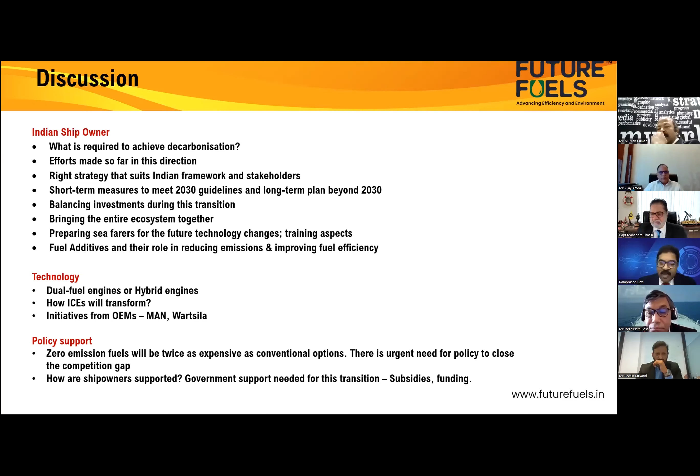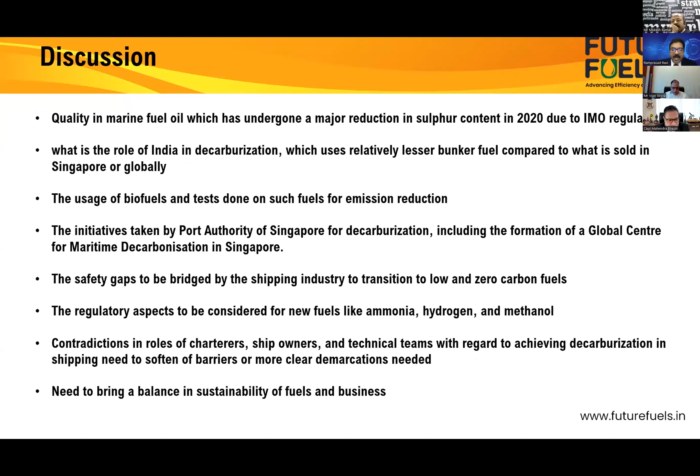Collectively, we put together the topics you see on the screen: what the Indian ship owner should be doing when at the crossroads of many options and challenges, how technology will change, what kind of policy support we require from government, and what is the quality of marine fuel coming up. Are there any interim strategies before we reach the net zero goals, any shortcut methods we can adopt? So a host of issues are there.

I'm not getting into the details because you have a wonderful set of panelists and two sessions awaiting to share their insights in this webinar.

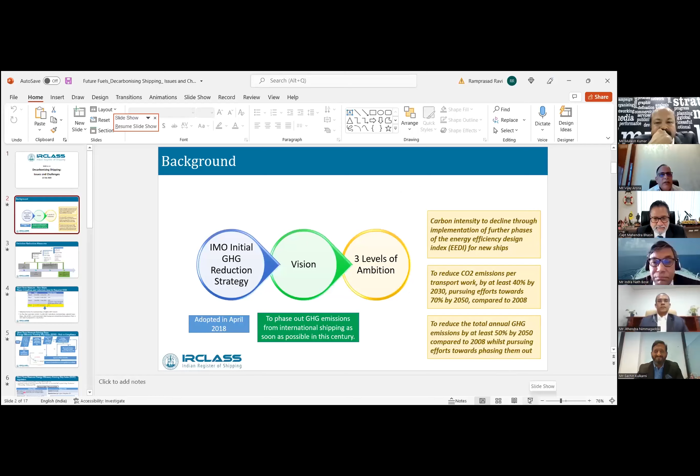Anything starts with a strategy, and if you look at IMO, they have been working on how the various emissions in the atmosphere have been controlled over a period of time. We talk about NOx emissions - tier 1, tier 2 requirements came, then it came to sulfur, desulfurization, and later on came the IMO strategy on decarbonization, saying how we can further improve GHG emissions.

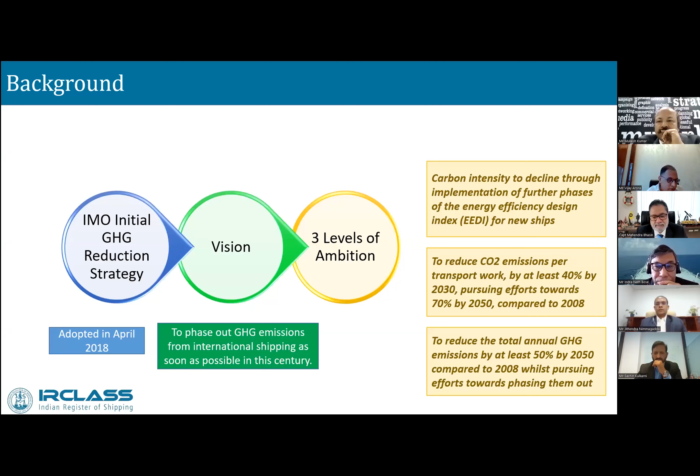This IMO strategy was adopted in April 2018. The vision was to phase out GHG emissions from international shipping as soon as possible in this century. To achieve this, we desired a combination of factors: carbon intensity should improve by improving the EEDI, we should reduce CO2 emissions by 40% by 2030 and 70% by 2050, and reduce GHG emissions by 2050, all compared to 2008 levels.

So to achieve the vision, there were short-term, mid-term, and long-term measures adopted. Short-term measures were from 2018 to 2023. 2023 to 2030 are mid-term, and 2030 onwards will be long-term measures.

We are currently in the short-term measures. When we look at those measures, we can see that in 2018 we came out with something, SEEMP Part 2, which talked about how fuel consumption should be collected, and in 2019 we started collecting the fuel consumption. Then in 2020, we talked about how the new ships' EEDI phase can be advanced, and that is how new ships are helping us see that CO2 emissions can be reduced.

At the same time, we are coming out in 2023, where EEXI and SEEMP Part 3 are coming out, where in EEXI we'll be using the IMO fuel consumption data, which is available with us, to see how the carbon intensity indicator will be used to determine how both existing ships and new ships combined together are able to help us achieve the 40% reduction of CO2 emissions by 2030.

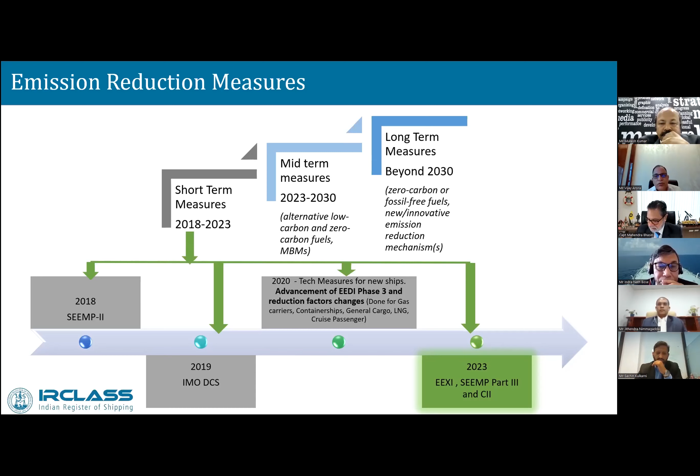This is talking about the various phases of reductions which were applicable for EEDI, mostly from the new ships. Basically, the effort started from 2013, and the efforts are on the direction of how we can reduce CO2 emissions by designing ships in a manner that fuel consumption is reduced.

As stated in the IMO strategy in 2018, phase 3 has now been advanced to see that certain ship types of larger tonnage will be requested to start building ships in a manner that CO2 emissions are reduced. This advance from phase 2 to phase 3 will take place from April 2022, where such ships, maybe gas carriers or container ships, will be advised to have further reduction factors of 30% applicable.

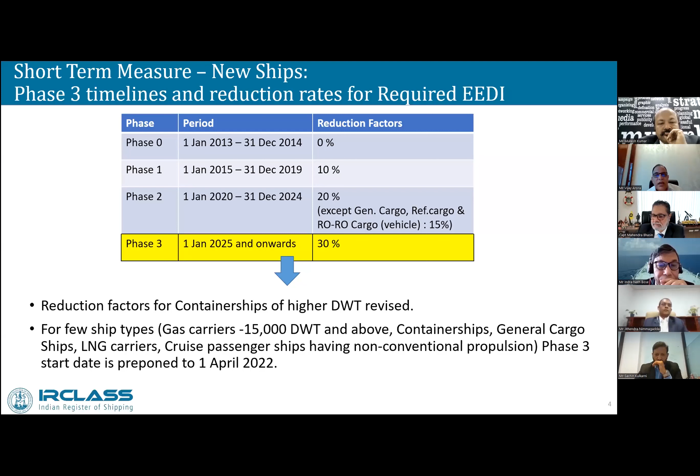As just stated, the combination of new ships and existing ships will continue for some time while we are using fossil fuels, and new ships are being designed with higher reduction factors. Even the existing ships need to catch up with the new ships basically.

For that matter, IMO came out with a regulation stating that ships of 400 GT and above, and certain ship types mentioned in regulation 25, if their threshold value is greater than a certain deadweight, are subjected to this regulation. That is how the attained EEXI will be calculated. The required EEXI will be calculated, and we'll be comparing that attained EEXI should be less than the required EEXI, to see that the ships are issued the technical file and the International Energy Efficiency Certificate.

This will be mandatory from 1st January 2023, coming on any annual, intermediate or renewal survey falling due after this date. But the regulation will become effective from 1st November 2022.

I would like to reinforce this issue: 1st November 2022 is a very important date. By this date, the ship owner should ensure that the technical file, if possible, can be placed on board. So if the PSC boards the vessel, you have a technical file available with you.

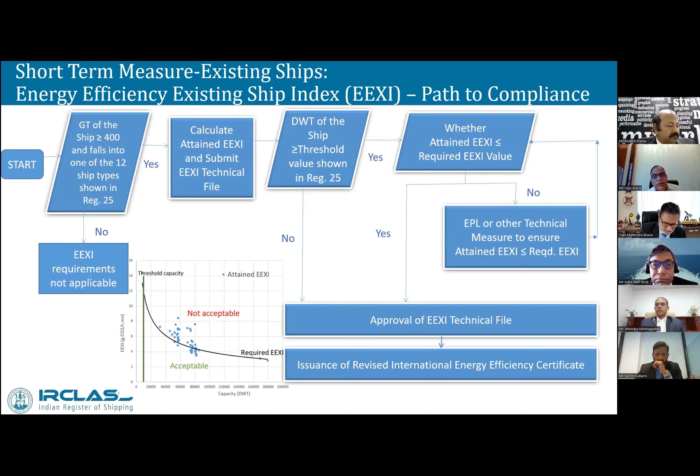And then the IEC can be issued when the surveyor boards after 1st January 2023 for whatever first survey falls due. So this is talking about attained and required EEXI, which I talked about.

Here I have just given information as to what all documents are required, what all parameters are required for submission for calculation of attained and required EEXI, as shown on the screen. Specific fuel consumption is required, engine power is required, capacity and deadweight and reference speed are required, and conversion factor is required.

For calculation of the attained EEXI, the required EEXI has a formula which talks about needing the reference line value and the reduction factors available. Here, the important point is that the reduction factors for EEXI are compared to phase 2 of EEDI. That means today's existing ships have to match with the EEDI of ships built to phase 2 requirements, which is a very difficult task, but the owners have to do it.

Here, a little more difficult task is that if the ships are built before 2013 and don't have the sea trial report, there are some issues. But yes, those issues can be resolved, where either you can opt for the approximate value to be used, or you can go for CFD analysis.

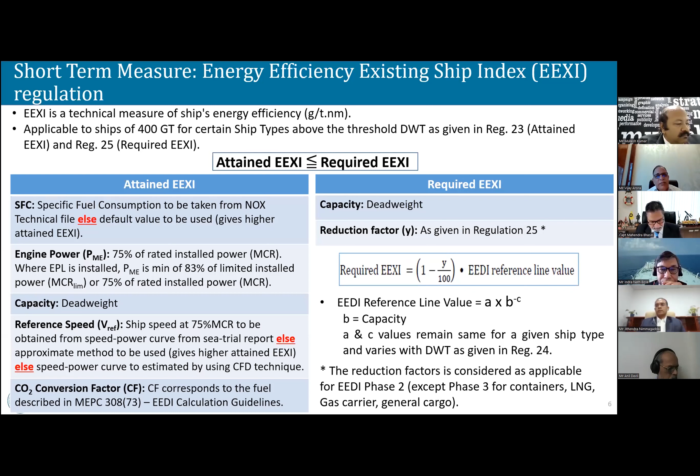The approximate value helps you, but it is not so encouraging for the ship owner because the attained EEXI goes on the higher side, by which the ship owner is affected. But if CFD techniques can be used to really determine the reference value, which is not otherwise available, then the ship owner is at least not badly affected.

So these are a few other situations which can help us if the attained EEXI is not less than the required EEXI. Everybody is aware of engine power limitation; then we can always superimpose certain fixtures like a bulbous bow, or we can put some boss cap fins, or we can adopt air lubrication systems.

These are energy saving devices which are available and can be used in case the attained EEXI is coming out to be greater than the required EEXI, or we can use a combination of factors. Let us be clear that if we are able to meet EEXI today, it is good.

But you have to meet CII also for all the time till you operate these ships. So it is always better to improve your attained EEXI to a larger extent so the design itself takes care of your operational efficiency, because old ships cannot operate more efficiently than they do today. You can control to some extent, but if you fit such energy saving devices on your ships, you will be able to run them for a larger period, because this design efficiency will give you a factor in the CII part.

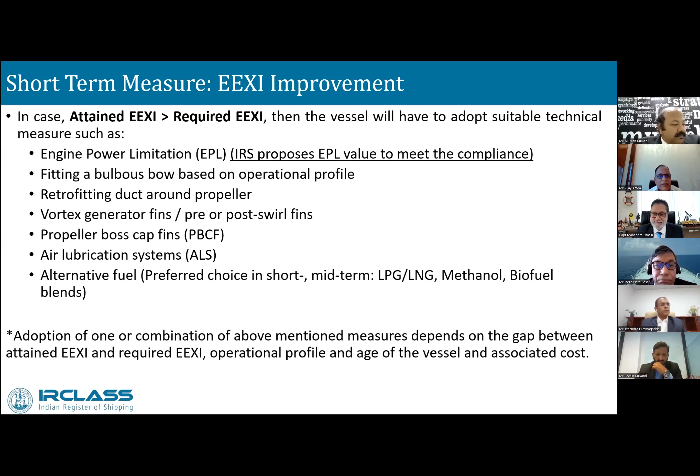This is again for the use of the industries and the people who are going to sail on board, because when EPL is used, it is not that you cannot override it. You can override it in certain situations which are mentioned in the onboard manual.

It could be adverse weather condition, rescue operation, or avoidance of pirates, and in those cases you need to record it in the onboard management manual, then inform the administrator, the RO, that you did use it, and at the next port ensure you bring it back to normal.

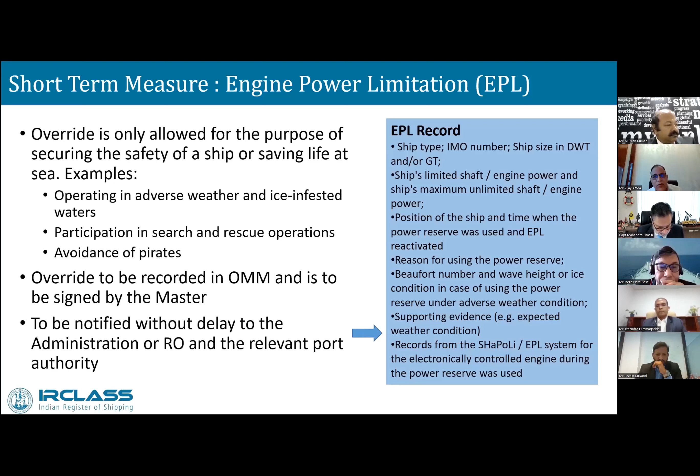Records which are required to maintain the OMM manual are listed over here, and when the onboard manual is there, they'll be referred to this.

This is the calculation we have done for vessels where data is available with us. This example is only for tankers and bulk carriers. You can see the red dots are above the blue dots, where the blue dots are the required EEXI for tankers and bulk carriers, and the red dots above mean the attained EEXI is not meeting the requirement.

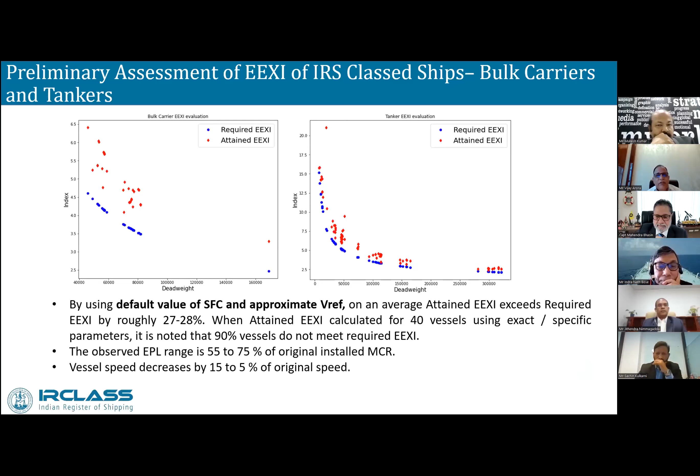So most of the vessels today, almost 90% of the vessels at least with us, have a problem that they will not be able to meet it unless they adopt some measures. The range in which measures are required may range from 55 to 75%, which may lead to a reduction of speed from 15 to 5%.

So this slide is important. Here we are talking about the CII part and the new regulation coming from the operational energy efficiency measure. In 2023, when this regulation comes into force, you already have to have a reduction of 5% from the 2019 fuel database, which people should have taken into account, but not many must have. So there is something to be done on the operational efficiency measure so that you meet this.

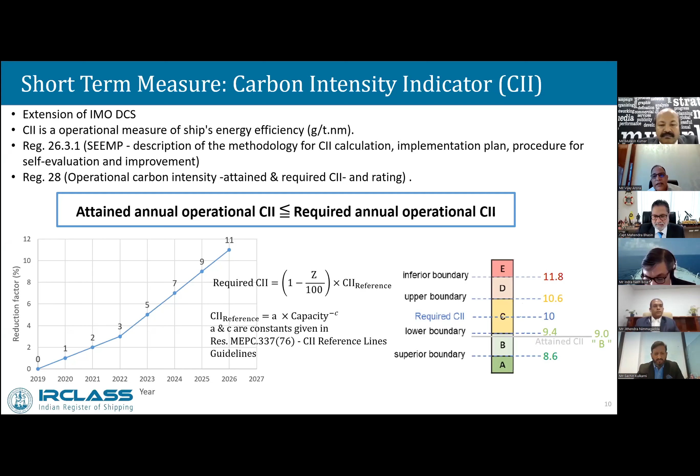Otherwise, it is quite possible, given the ratings A, B, C, D, E, once you calculate that - we have given an example here for a certain ship where the required CII is, let's say, 10 and the attained CII comes to 9, she falls into B category. But as the period lapses, the same ship, due to no further improvement, may go to C, D, and E, which becomes a discouraging factor for the ship owner.

These ships which are in A, B, and C start going to D and E, which the IMO discourages, to the point that they don't want a ship to have a continuous rating in D category for more than 2 times, or in E category. That becomes an issue which needs to be addressed by using energy saving devices, basically.

So these are the factors which are available. Basically, we can improve operation. There was SEEMP Part 1, but we never really used it, it was just kept on board. Not many ship owners or managers used it, but these are things which can be used. We can list it and see how operational efficiency can be improved.

Here I have talked about biofuels and alternate fuels. I haven't discussed the alternate fuels part in detail, but the industry is working on this. It requires a good approach from various industry people, governments, lending institutions, plant and engine manufacturers, and yards. They need to come together to look into the advantages and disadvantages of the various fuels, because it's not very clear yet. Though we know the properties, the infrastructure needs to develop and storage capacities need to build up.

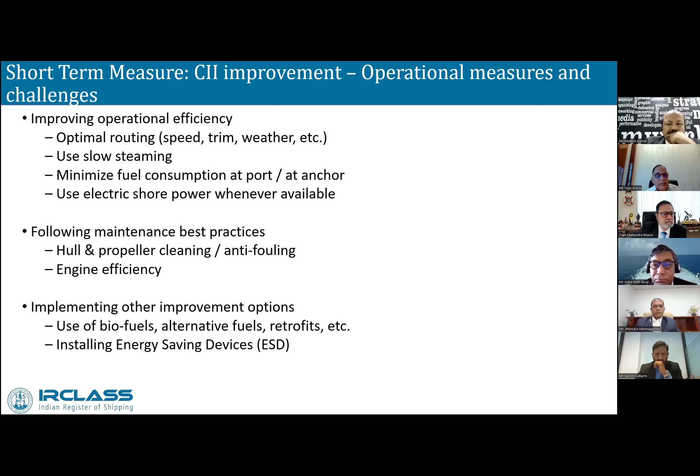These things will lead to understanding which fuel will be useful to us. While we know the fuel which is most visible is LNG, we have been using this fuel for a good amount of time, so we are familiar with it. But we see that LNG can be a fuel used for the next 5 years if we want to see how best our CO2 emissions or decarbonization can take place.

So this is talking about SEEMP Part 3, what data is required and what it will contain. This will be listed based upon when the submissions are made. It is for information only that SEEMP Part 3 is required. The owners have to ensure the implementation plan is understood, and they are aware of how they will set improvements into their own system so the carbon intensity indicator is improved or retained, either in A, B, C category.

But let them not go down to D or E category. And if they go from D to E, the corrective action plans need to be prepared and approved by the administration or the RO, basically.

As far as IRS is concerned, sir, we have made rules for these types of ships. Gas fuel vessels, LNG, LPG are available with us. We have made natural gas fuel guidelines for coastal vessels and inland vessels also. We have made guidelines on methanol fuel vessels, fuel cell power vessel installations, high voltage shore connection systems for ships, and for battery powered vessels.

Why are these guidelines there? We have put them into guidelines and not rules, so that as more experience is gained, we can add to them and see how best to incorporate them into rules. So this talks about what we have done till now, with the help of the industry. We are thankful to the industry for helping us with this action.

We have been able to run 2 cement carriers using B20 biofuel, wherein we attained a reduction of CO2 by almost 7%, with no impact on NOx or SOx. That is also a good point.

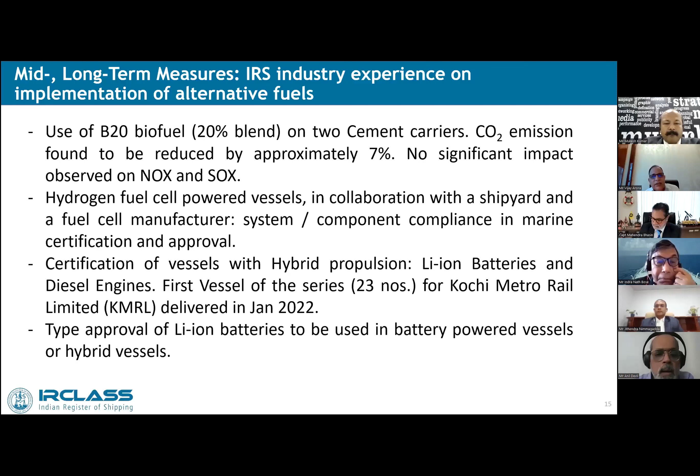We have prepared a web-based electronic tool which can help us do the EEXI calculation. It is simple, you feed the data, and it is available.

And if the attained EEXI is less than the required EEXI, the technical file is prepared and can be submitted straight away to IRS for approval. And we can undertake these EEXI assessments and issue you the IEE certificate.

We can help you determine what energy saving devices can be fitted by using our CFD analysis. We have also prepared the CII tool, which can be used for measurement of CII ratings.

And at last, we can conduct various trainings and workshops like this to see how best we can help the industry. We are geared up to see how best, in the initial phase of short-term measures, we can help the industry.

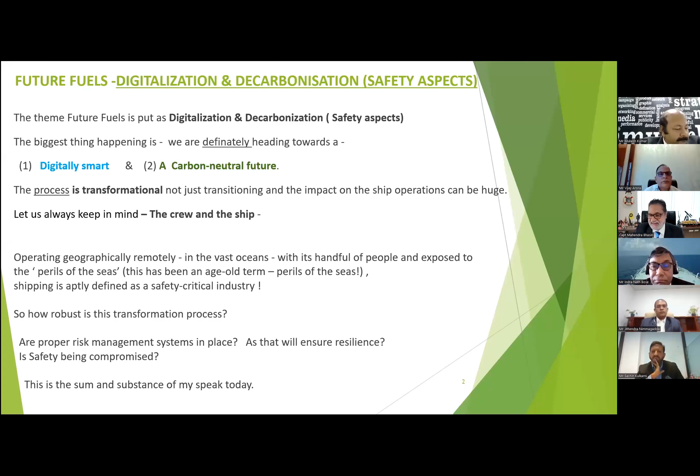Now, what is digitalization doing? It is catalyzing a wider use of data, data-driven models. I repeat, data-driven models and remote services in shipping, leading to improvements in efficiency and productivity. You will also notice I have put the heading instead of future fuels or decarbonization, I've said digitalization and decarbonization.

Because they go hand in hand. At the same time, the industry is also trying to find pathways towards decarbonization. In many cases, it is the digitalization that is enabling innovation in decarbonization as well.

Innovative technology is central, sure, but insufficient in isolation. Why did I say that? The success of this transformation depends on people, who are the sharp end of business. The seafarers who perform and who deliver.

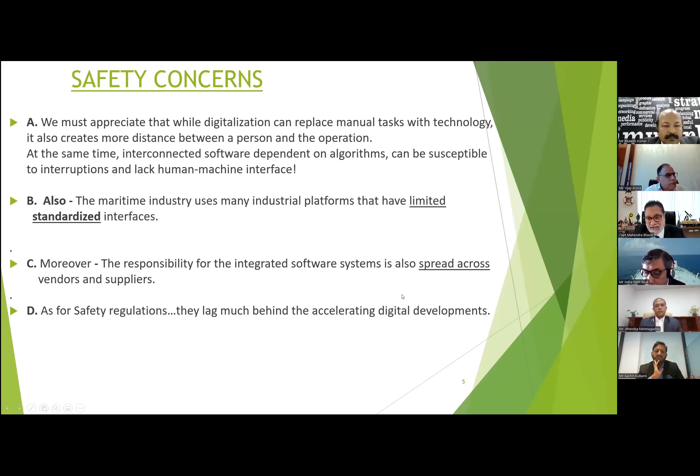Solutions. What should be done? Verification method of future systems should be based on a systemic perspective on safety that consists of people, organization, and technology that are all related to each other and their environment. As a matter of fact, close collaboration throughout the entire life cycle will greatly facilitate system integration.

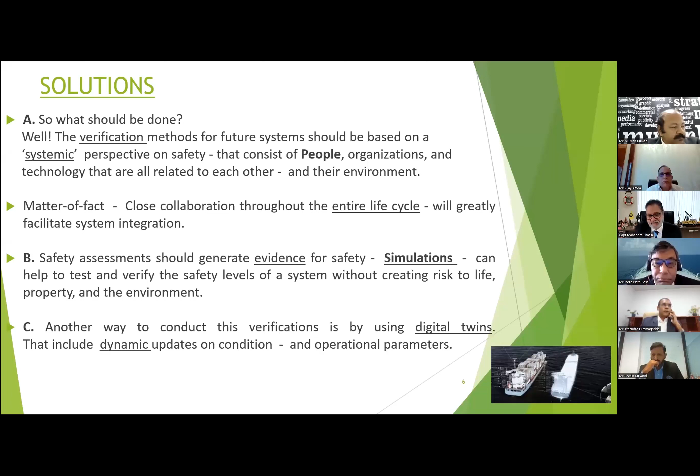Safety assessment should generate evidence for safety. Simulations can play a major role. Simulation can help to test and verify safety levels of the system without creating a risk to life. Another way to conduct this verification is by using digital twins that include dynamic update on conditions and operational parameters.

Now I'm coming back to the subject. I was very glad Mr. Bose and Mr. Arora spoke most of the things, so I'm not going to dwell much on the other one or two slides. Only thing, keep in mind the latest target: 40% by 2030 and 70% by 2050, that the IMO has set this ambitious target.

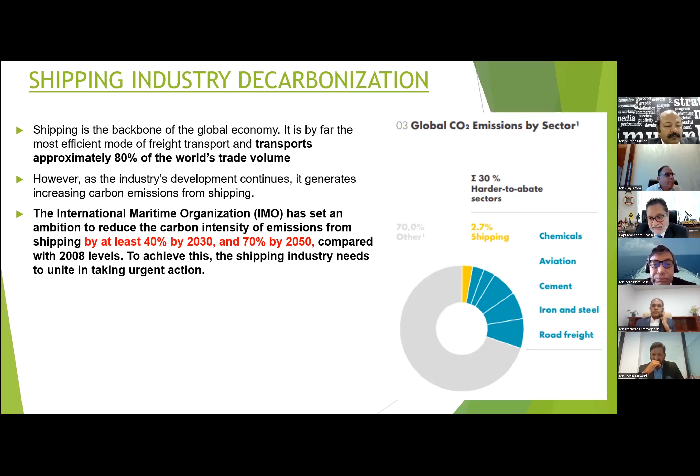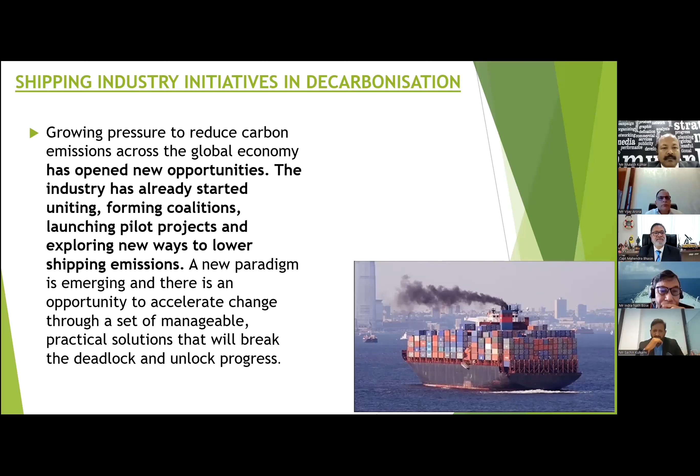To achieve this, the shipping industry needs to unite in taking urgent action. There is a growing pressure to reduce carbon emission. But the industry also started forming coalitions, launching pilot projects. But where are we going? Where have we achieved? Do we have enough data?

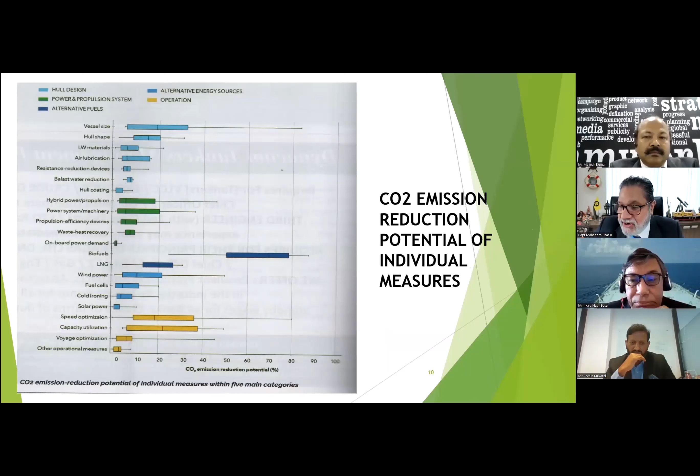This is the most beautiful slide. I think every person who is doing R&D should always have that, because it shows CO2 emission reduction potentials of individual measures. It talks about various things we can assist along with the fuel. Fuel is one of them, alternative energy source.

You can see vessel size, hull shape, power propulsion systems, operations, voyage optimization, and all these play a major role in CO2 emission. And digitalization, you all know, plays always a major role in this.

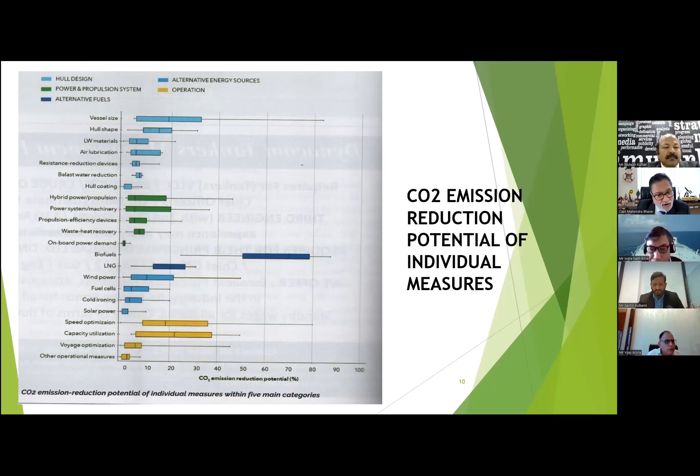While industry is exploring several alternative fuels, okay, there are 2 minutes more. Alternative fuels, including hydrogen, ammonia, but shipping leaders say they have commercial and technical limitations. Mr. Arora spoke about EEXI, very important date, sir, 1st November '22. Owners, administration, industry need to be ready for that.

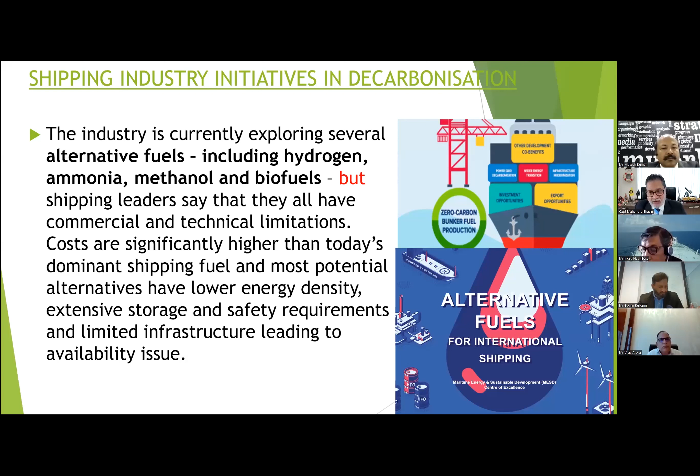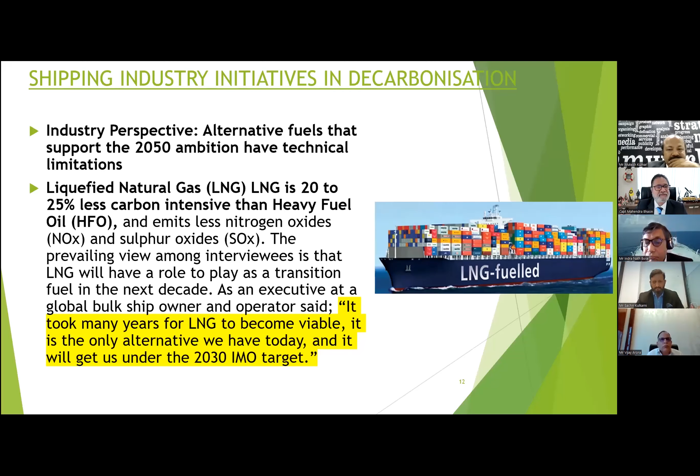What happened after that? That's what we are all discussing. Other alternative fuels - hydrogen and ammonia, biofuels, methanol - ongoing research and development will tell us about future fuels beyond these.

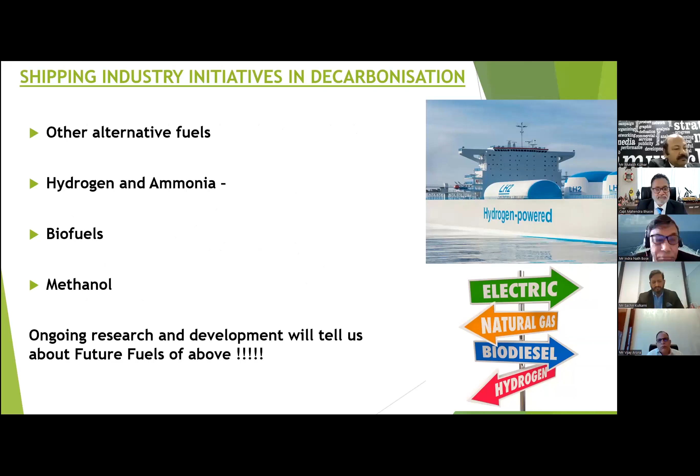Well, I will not touch much on this because it was spoken briefly earlier. What are the future technology and the requirement, objective? Safety of the crew, safety of vessel environment, running of vessel efficiently, economically, timely, complying with all regulatory requirements.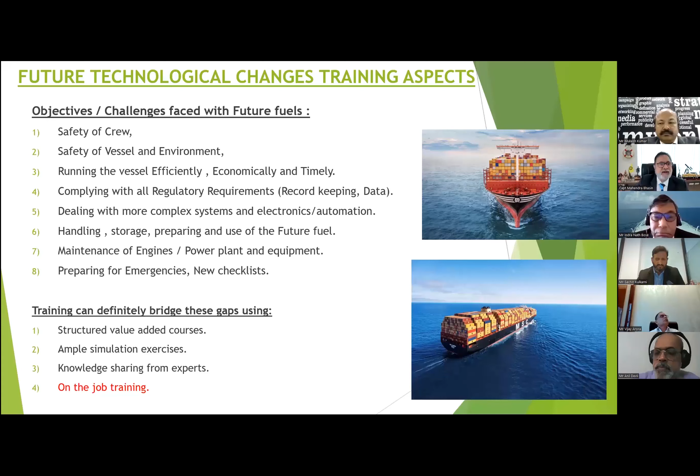In conclusion, sir, digital transformation calls for system integration and new ways of managing risk associated with complex systems. Transformation to carbon neutral shipping requires stakeholders to collaborate to increase transparency and create a culture of continuous learning. Most important, both these advancements should be complemented with efforts to keep people in the loop, so that innovative technology that is designed, maintained, and operated by optimally performing people in organizations that embrace holistic risk management is what will put the industry in the best position to transform itself through digitalization and decarbonization.

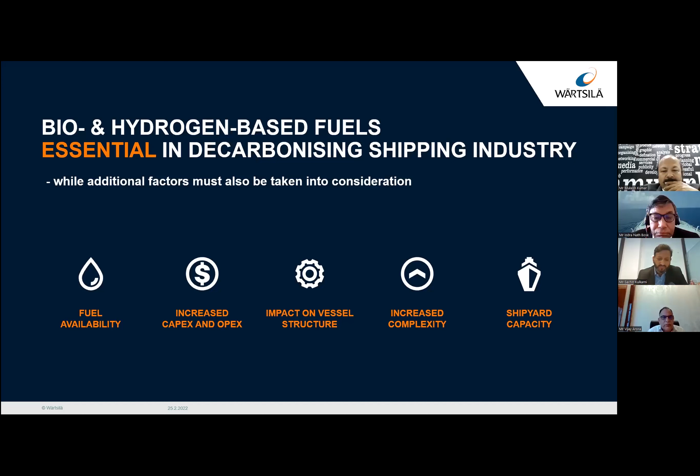Then there's the timing issue. When should one make the investment and go for another fuel? We have a limited number of shipyards, and at any point in time it won't be feasible to upgrade all vessels or build new vessels simultaneously. So these are the factors one needs to consider before taking the decision.

So what is the solution forward? We believe that investing in flexible fuel solutions mitigates the business risk associated with future fuel. The combustion engine is fuel agnostic. The business impact of future conversion can be reduced further by preparing the fuel tanks. It's important to understand that the engine doesn't really care whether we feed it LNG or ammonia.

It's also important to remember, when building a new ship, that the fuel supply system must be factored in. This is perhaps the toughest thing to change during a retrofit project. While building a new vessel, one must think about the storage part too. These tanks installed today need to be suitable for the transition to green fuels in the future. At Wärtsilä, we continue to support and supply the complete system regardless of fuel. We are ideally positioned at this point to provide the complete integration solution - the complete fuel propulsion package from the tanks, the fuel supply system, the engines and propulsion.

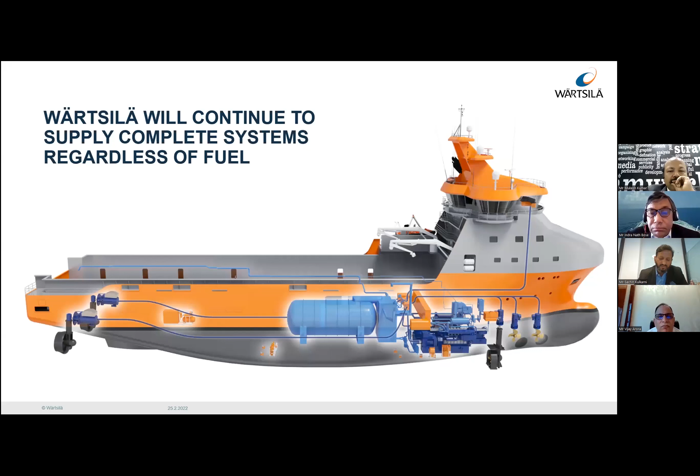So if a ship owner has a diesel engine today, what can be done at this point before green fuels are available? When we look at the diesel engine, there's potential for upgrade. We can look at improvement in efficiency via different upgrades. We can also look at converting the engine to DF or SG engine and LNG, which can give a certain amount of reduction potential, as we can see here.

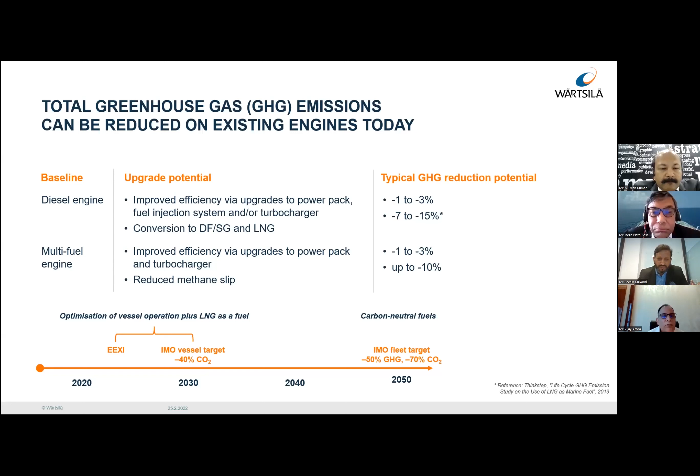If we have a multi-fuel engine already, that's an advantage position. Then we look at improvement in efficiency via different upgrades, and we can also look at reduced methane slip. Looking at the milestone till 2030, there are various ways - EEXI plus optimization of vessel operation plus LNG as a fuel could be the recommendation. Moving forward to 2040, once green fuels are available, we can look at carbon neutral fuels.

With continuous development of technology at Wärtsilä, our future fuel roadmap is very clear. Looking at biosynthetic methane, it contains 99% methane and can readily be used in liquid form with equivalent equipment made for LNG. Then we have methanol - its conversion package is already available for one of our engines, the ZA40, and I'm pleased to share that we now also have another engine, the Wärtsilä 32, already compliant with methanol usage.

We have the technology, and now we're looking at industrializing this across Wärtsilä's different engine portfolio as per market needs. Looking at ammonia, we have a technology capable of using it, though we still need a combustion concept to maximize engine performance, and safety aspects are currently being investigated. For hydrogen, our gas engines can already blend hydrogen with LNG up to 25%, and we're currently working on defining the technology for pure hydrogen, focusing on maximizing engine performance.

While this research and development is in process, how do ship owners look at the situation currently? Transition fuel is necessary to cope, since green fuel isn't available yet. So customers, ship owners, need to act now if they want to reduce greenhouse gas emissions from their vessel fleets.

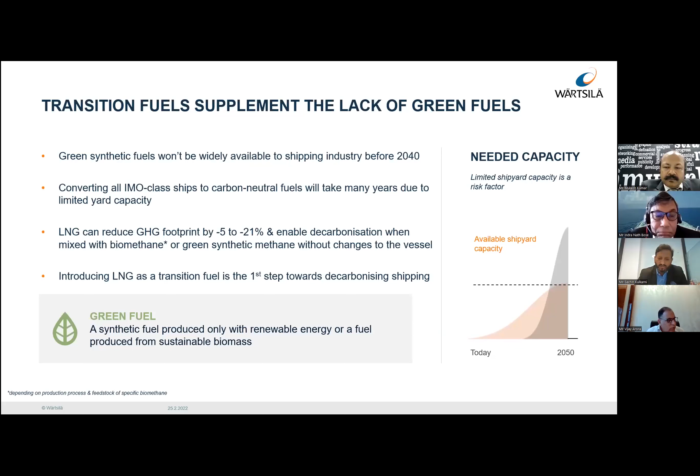As a ship owner, what should they invest into at this point of time, and what are the operational considerations to be done. So typically summarized here: one is to look at sustainability of the fuel, its availability, its price. Then it's also important to see the required vessel endurance.

When we look at the different fuels, due to the low volumetric density of the different fuels, the vessel endurance could be different. That needs to be considered. The tank size and location is another important operational aspect to be considered. Blending versus pure - what are the output requirements, efficiency requirements, emissions, and along with these green fuels, if any exhaust gas abatement is to be done.

What are the systems to be changed when we're looking at introducing a new fuel? From us, the input is basically the fuel gas supply system - that's a very important part. There we need to look at the materials, the different pressures, insulation, and toxicities associated. A small modification involves the engine top part, fuel injection system, cylinder heads and piston tops, exhaust gas abatement like SCR, scrubbers and carbon capture depending on the particular fuel. And of course, importantly, safety systems, and the impact of marine classification on safety systems. These are the few changes associated when introducing a new fuel.

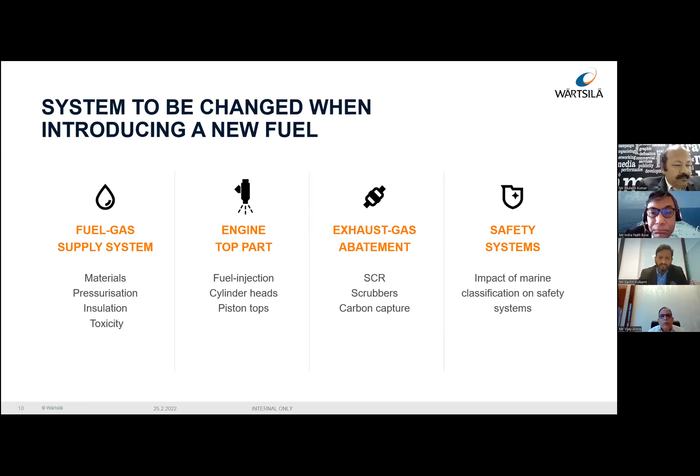So as a summary, what are the key takeaways? There is no single future fuel - there will be a whole variety in use. Investing in fuel flexibility will mitigate compliance and business risk. Wärtsilä will continue to supply a complete system regardless of fuel, and the multi-fuel engine offers a viable upgrade path to future fuels. With this, I would like to conclude my opening remarks.

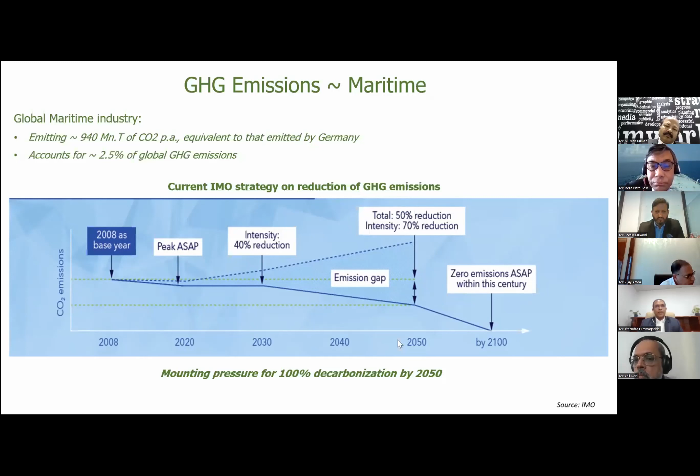And we are also seeing a lot of initiatives being taken by the industry. So what are the kind of future fuels that are currently on the radar in terms of meeting these decarbonization targets? We are talking about LNG as an immediate intermediate fuel in terms of reducing CO2 emissions, and there have been a lot of vessels already plying commercially, with bunkering happening. We are talking about other fuels like methanol, hydrogen, ammonia coming into the picture, into the frame. Biofuel is also one of the other future fuel options. So whether anything has been finalized, whether something has been taken up by the industry as a standard - well, it depends on several factors, including the kind of technology on board and onshore.

What is the kind of energy density that each of this fuel delivers? The safety requirements of the vessel, of the onshore, as well as the crew. The scalability of this particular technology and the availability of this fuel across the globe. The ease of transportation from place to place, and of course, the financial viability. Of course, these are the major factors which will determine which of these fuels or a combination of fuels will be becoming the options for the future fuels.

However, the jury is still out. This is still some time, at least in my mind, at least about 5 to 10 years away before a fuel, or a combination of fuels, gets finalized and the industry moves towards its standardization.

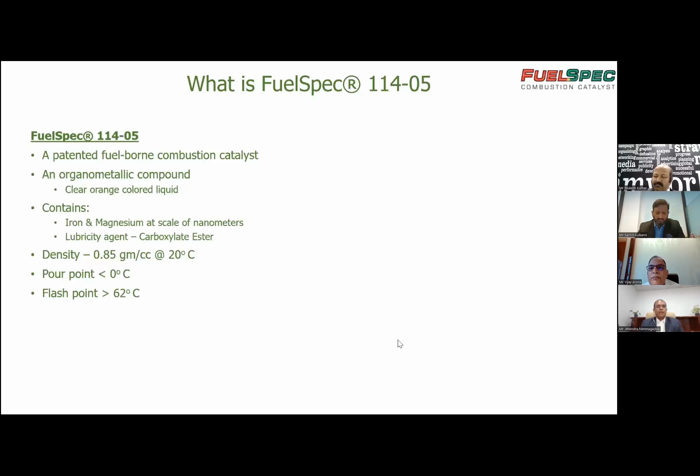So what is its functionality, or what does it do to help reduce these kinds of emissions? It basically improves the thermodynamic efficiency of the combustion of hydrocarbons through a catalytic process. It's a patented and proprietary technology based on electromagnetic emission spectra complementarity. So what does it do? It actually leads to complete combustion of fuel.

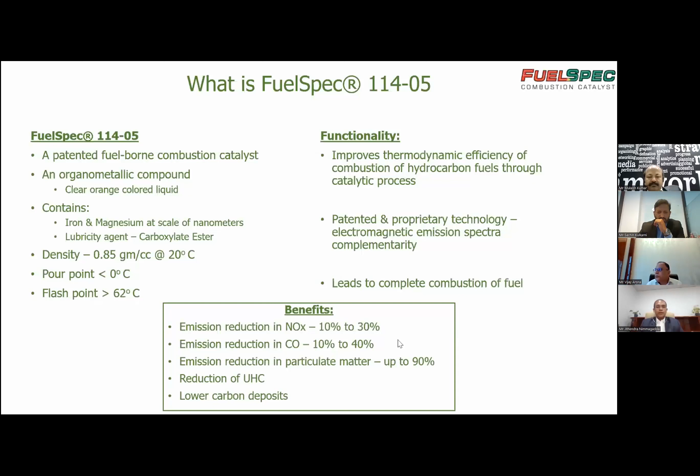Normally in any kind of combustion engine, you'll always have a certain amount of hydrocarbons coming out as unburnt hydrocarbons, so the combustion is not 100%. That leads to excess emissions, whether soot or particulate matter, UHCs, NOx, CO, etc. Because of this complete combustion by Fuel Spec, there is a reduction in NOx, what we have observed from empirical results as well as field trials, by up to 10 to 30%. Similarly, an emission reduction in CO of up to 40%, and a particulate matter reduction of up to 90%. Similarly, there is a reduction in UHCs, and it also leads to lower carbon deposits in the equipment.

So how does Fuel Spec work? Fuel Spec actually has very high miscibility, that is, it gets very easily mixed with the fuel. In the pre-combustion process, Fuel Spec gets completely and homogeneously mixed with the fuel through the compressed air.

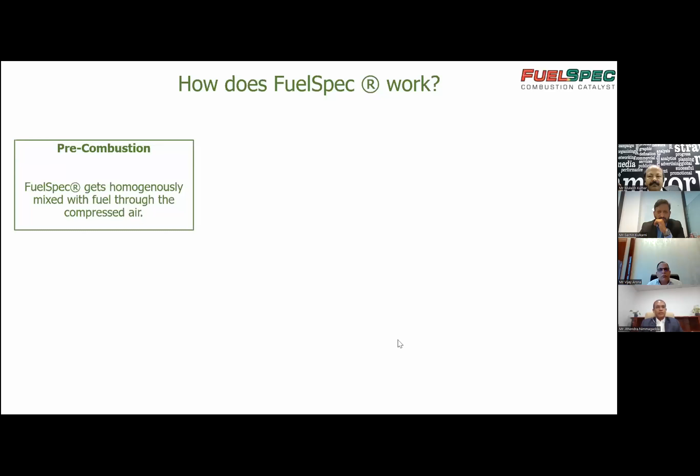During the first phase of combustion, that is the actual combustion which happens for the hydrocarbons in the engine, normally the fuel gets burnt, and then a certain amount of energy gets wasted because the entire energy doesn't get transformed or translated into 100% combustion. That is where the iron and magnesium components of Fuel Spec actually store the energy, that is the peak heat, during the first phase of combustion, and release that heat in the second phase of combustion, or the second half of the combustion.

So regarding the electromagnetic complementarity I mentioned, magnesium captures the energy and iron also captures the energy. Iron initially releases that energy to the hydrocarbons, and similarly the higher spectrum magnesium transfers that energy to iron, and then subsequently iron transfers it back into the fuel. This is what leads to complete combustion of the fuel.

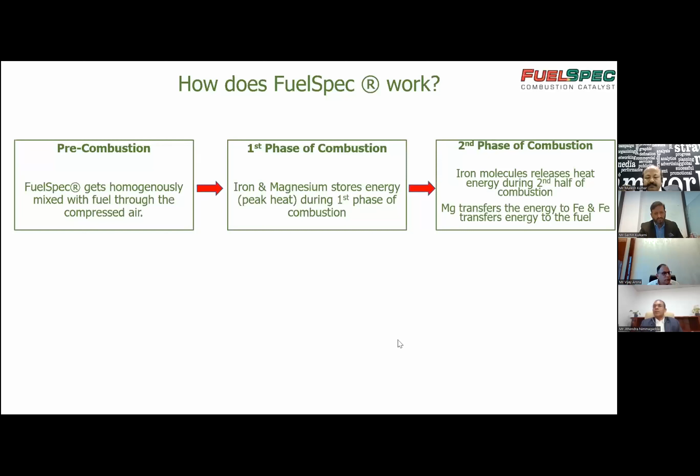That is the reason why, in a normal process, the hydrocarbons don't get sufficient heat for full combustion. With this catalyst, it captures the peak heat and transfers it to the fuel during the second half of the combustion. Hence there are no temperature hikes and the heat transfer is more evenly distributed. Because of its excellent miscibility, the fuel spec gets completely mixed and has a greater surface area for transfer of energy into the hydrocarbons.

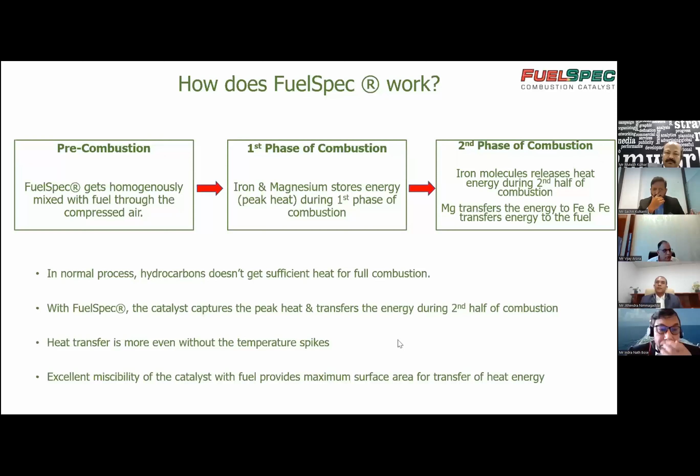So how is it used? Do we require any additional equipment or infrastructure, on board the vessels or on shore? Absolutely nothing. It's just a very simple mixing ratio of 1:4,000 - for every 4,000 liters of fuel, 1 liter of this fuel spec has to be added. You can see the pictorial representation of how simple it is in terms of the addition, just a direct mixture based on this ratio.

All types of fuel that goes into either the vessels or the heavy mining equipment, the logistics industries, or the fuel-fired boilers - all of these can be compatible fuels for usage of fuel spec, whether you're talking about HFO, VLSFO, MGO, HFHSD, HSD, or LDO.

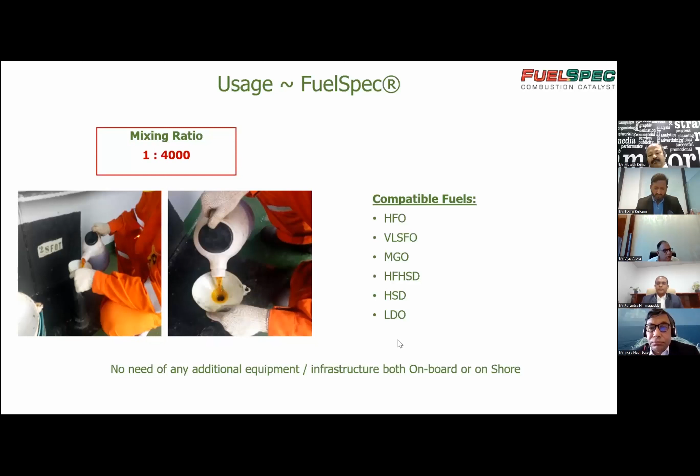One of the first questions which comes to most of your minds, I'm sure, is: is it safe? What happens if we mix this particular catalyst into the fuel? Does it damage the engine? Does it create any kind of other side effects? Absolutely none.

First and foremost, the average particle size of this ferrous and magnesium is less than 10 nanometers, in fact it varies between 5 and 10 nanometers. So the metal components are less than 1/5th to 1/10th of the maximum EPA limit prescribed by the US Environmental Protection Agency. Hence, there is absolutely no damage to either the equipment nor to the environment.

Second, the magnesium in this fuel catalyst acts as a cleaning and lubricating agent. And the melting point of both these metal additives, the ferrous and magnesium, is very high, more than 1200 degrees. So there is absolutely no question of melting or sticking inside the engine.

The fuel spec is just a catalyst. It doesn't interact, alter, or modify the properties of the fuel or any other additives used complementarily in the engines. Hence, there is absolutely no question of clogging or fouling the fuel purification systems, the piping systems, or any other pumping systems.

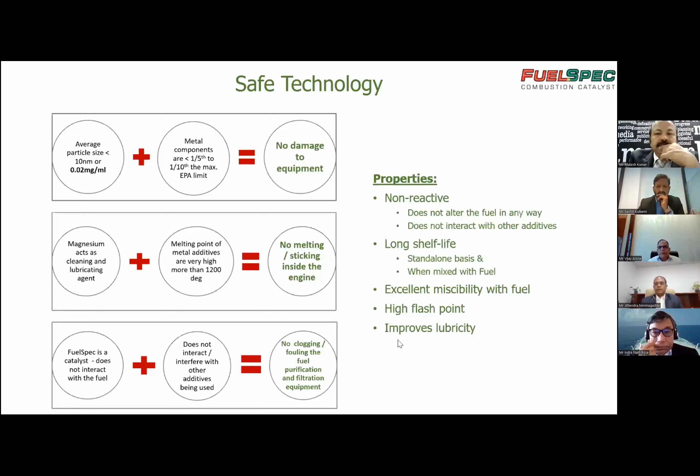It has approval from the US Environmental Protection Agency, and as I mentioned, it is less than 1/5th or 1/10th of the maximum EPA limit. The Southwest Research Institute of the US has tested this product when mixed with fuel, and it shows that this catalyst doesn't degrade or even modify the fuel characteristics. The NOC has already been obtained by Wärtsilä for usage in their engines.

I would also like to thank Mr. Sachin and the entire Wärtsilä team for that. It is also approved by GE Energy for usage in their liquid fuel-fired gas turbines, and it has been successfully used in various types of vessels - bulkers, bulk containers, general cargo vessels, VLCC tankers - both in Wärtsilä, MAN, and Caterpillar engines. The fuel spec has been successfully tested, and all its properties and results have been verified by IIT Hyderabad.

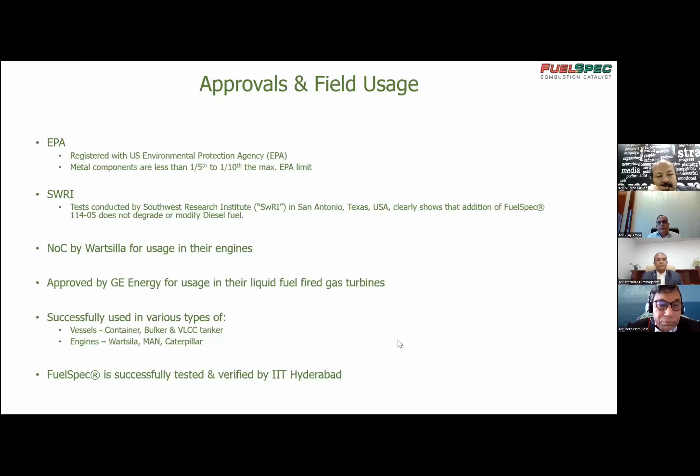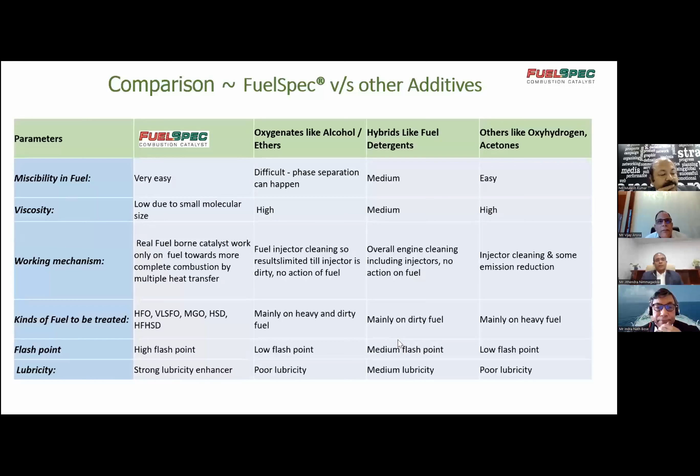So a very quick comparison - I'll not go too much into the details since I'm already running beyond the scheduled time. The FuelSpec, vis-a-vis other additives like alcohol-based ethers or hybrids such as fuel detergents, oxyhydrogens, and acetones, scores on almost every parameter: mixing capability in fuel, viscosity, working mechanism, kinds of fuels it can be used with, flashpoint in terms of transportation, and lubricity.

So with that, I'll conclude my presentation. Just a very small snapshot of our group.

Our group, Vishwasamudra Group, is a multilateral business conglomerate headquartered in Hyderabad and spread across entire India, and various other countries like Singapore, US, UAE, other Middle Eastern countries, Germany, Belgium, etc. We span various verticals starting from infrastructure, construction, logistics, shipping, maritime, manufacturing, commodity trading, security services, port operations, and real estate. Thank you so much.